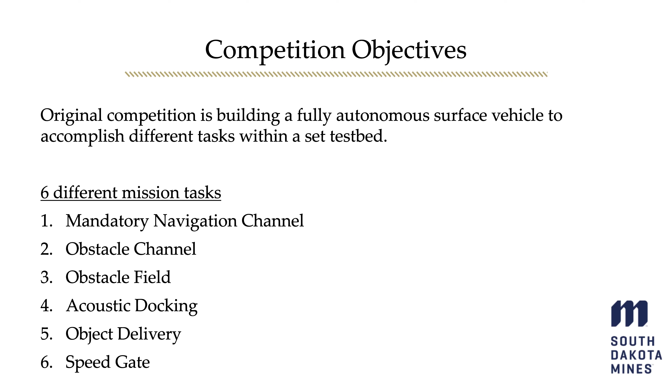For the mandatory navigation channel, this is the first task everyone must complete in order to even attempt the other tasks. They have to start 6 feet behind 2 sets of gates, which are spaced pretty far apart, and they have to go through them on their own and make it through.

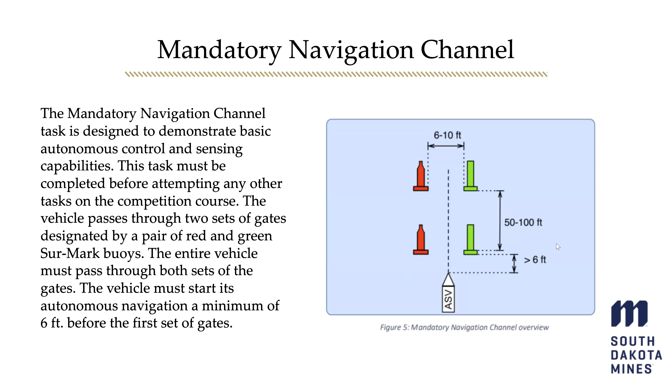For the obstacle field, they have to enter and do a 360 around the buoy in the middle. Some of the other buoys on the outside will only have a 4 to 6 foot gap between them, so they will have to configure the best route to enter and exit the obstacle field.

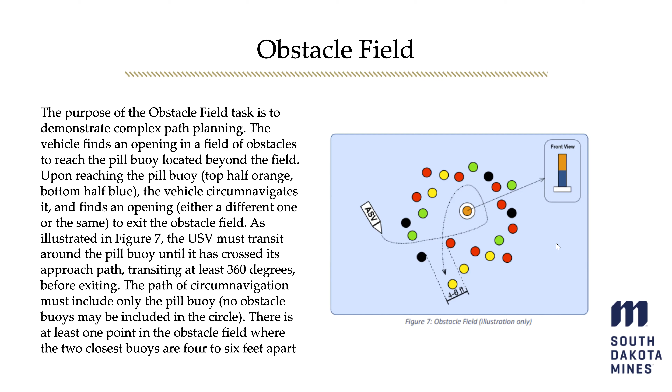Another task that must be completed is the acoustic docking one. Out of 3 docks, one of them will play an acoustic sound that the ASV has to hear and then proceed to navigate and dock itself there. There will be a symbol corresponding to the docking bay for each one, and it has a certain mark on it, which may be used for a task in another place.

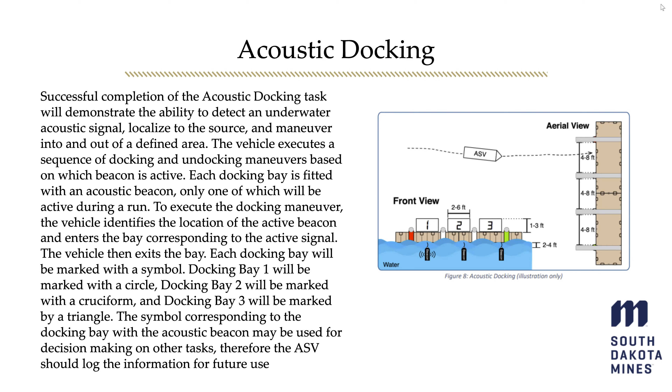Another one is the object delivery. From that picture, you can see the 4 target areas. Here the teams can either use their boat or a UAV to deliver objects to the target area, and that's just another level of how complicated they want to make it, if they want to actually have a UAV, because it has to deploy from the ASV.

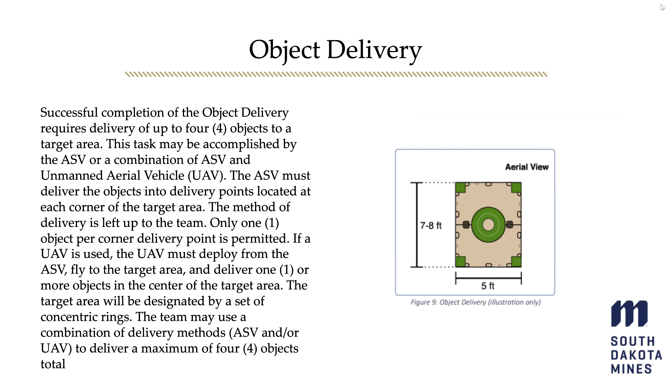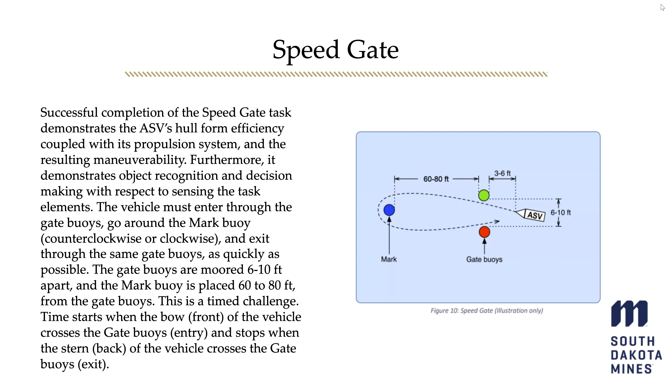The last one is the speed gate, and it's pretty simple, pretty much just a down and back as fast as the boat can go. It just has to start between those 2 buoys, go around the mark, and then make its way back in the fastest amount of time possible.

The final task is the return to dock, and that could be after however many tasks each team wants to try to accomplish. It's pretty self-explanatory, it just has to return to dock.

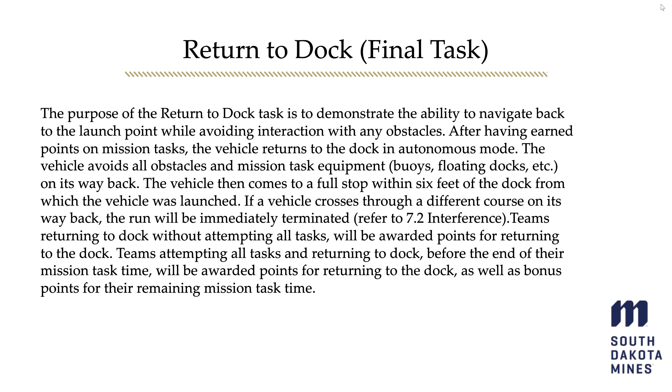For the outcome we want to accomplish for our semester project, we pretty much scaled our project down to fit within a 1 foot by 1 foot by 3 foot box, just because of the time limit that we have for our project.

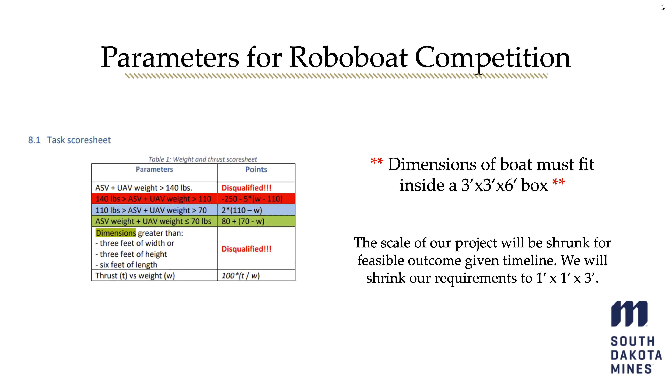Our project statement: our goal with our given time limit this semester is to create a fully operational remote controlled boat by implementing our own mechatronic system of components. We look to the future for the potential that our model has for applications that could involve a fully autonomous submodel to compete in the RoboBoat competition.

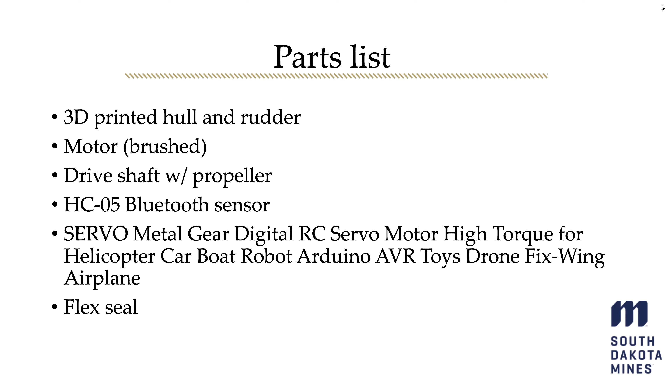So this is our parts list. We are deciding to 3D print our hull and rudder. We have chosen a motor, a brushed motor, and we'll explain pretty much all of our parts further down the presentation. We have our drive shaft with propeller, our Bluetooth sensor is the HC05, and our servo is a metal gear digital RC servo motor, a high torque for pretty much any DIY application. We're also using Flex Seal to pretty much seal the bottom of our hull.

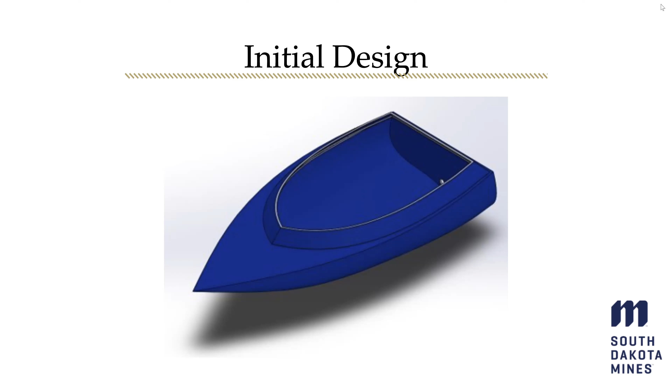All right, so this is our initial design of the hull or the shell of the boat. This kind of doesn't accommodate what has to go into the boat.

So that's when we started working on this design, which ended up being our final design. As you can see, it accommodates a piece that holds the motor in place so that the motor is able to drive the drive shaft. It also accommodates a piece that holds the servo, which will eventually control the rudder and steer the boat.

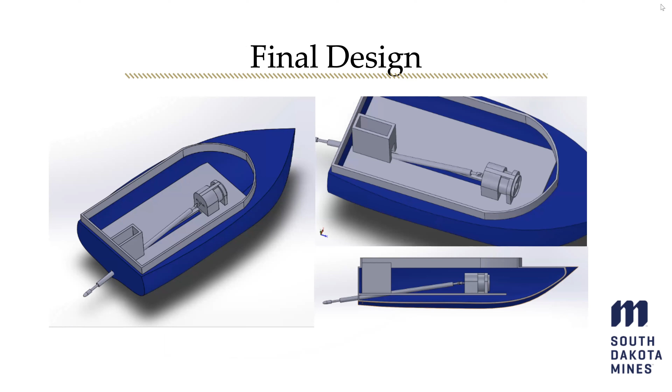And the drive shaft with the propeller, this is 300 millimeters in length, stainless steel, and it is compatible with a DIY model.

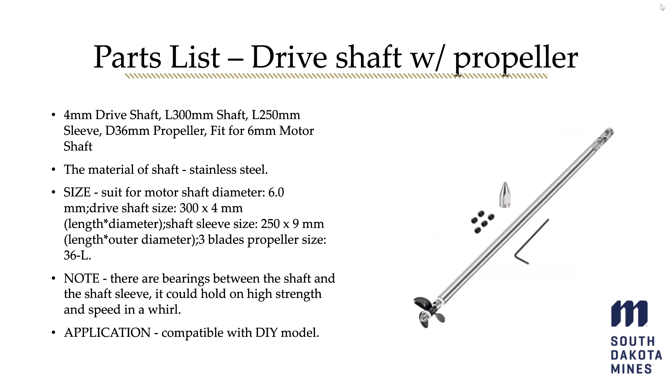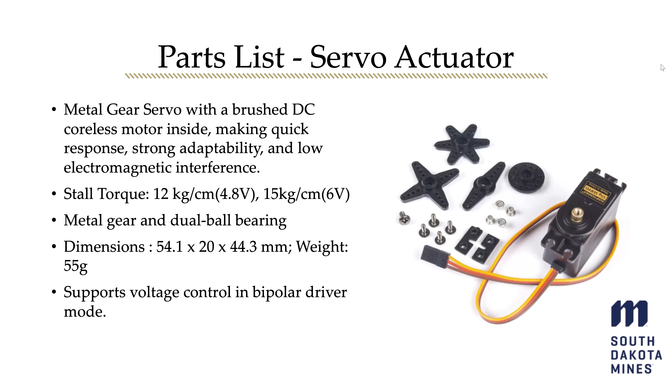So we're using a servo actuator to control the rudder of our boat. It's just a metal gear with a dual ball bearing and a brushed DC coreless motor inside. This will be really fast, and it does support voltage control, so we can do different speeds.

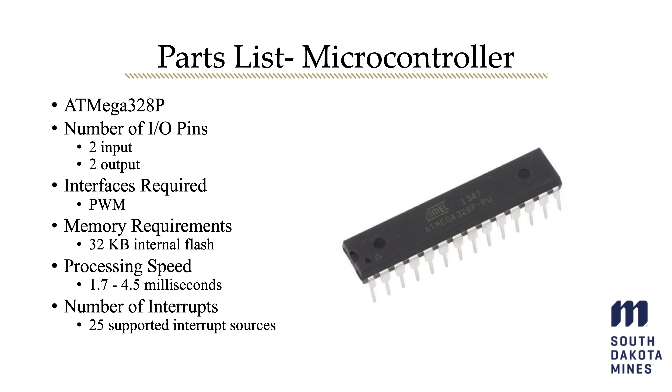So we will be using the ATmega 328P microcontroller. This was given as part of the assignment requirements, but to choose our microcontroller, we went through 5 different steps of deciding which one we needed: the number of input-output pins, the interfaces required, which was just PWM for multiple applications, memory requirements, and processing speed. The processing speed of the ATmega is a lot faster than we actually need, and then just the number of interrupts.

So like we mentioned before, we're using the HC05 Bluetooth sensor. Some limitations with this is that it must be used with Android because it uses Bluetooth 2.0 instead of iOS, which uses Bluetooth 5 or 4.0. So this will be one of the inputs to our microcontroller, and this will control the servo and the motor.